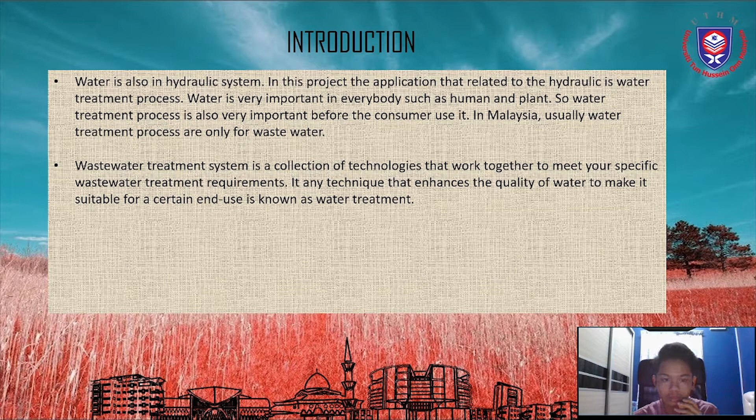Wastewater treatment system is a collection of technologies that work together to meet your specific wastewater treatment requirement. So water treatment system is mainly involved with wastewater, because wastewater is from water pollution. So we wanted to treat it first by using the treatment system.

So there are 7 stages in the water treatment process: storage, screening, aeration, coagulation and flocculation, sedimentation, softening, filtration, and lastly disinfection. These 7 stages are very important to make sure the water produced is clean and safe to use.

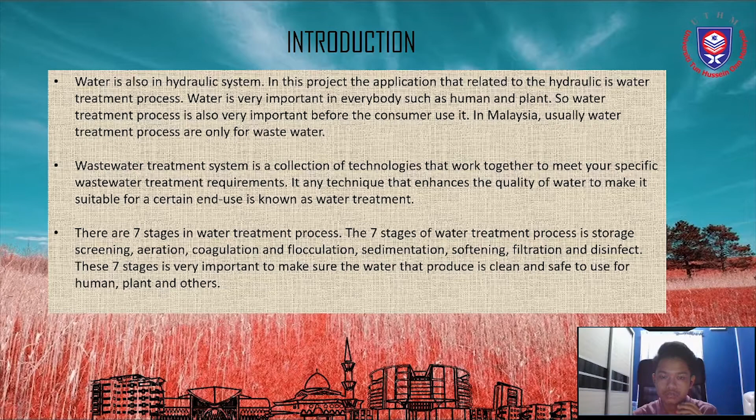for human, plant or others. Okay, why did we want to choose the water treatment process? Because we want to know more about the water treatment process. So from this, we like to say that water treatment process is very needed for human, to make sure the water we use is high quality and safe to use.

Alright, next for construction process. Water treatment utilizes many treatment processes to produce water of the desired quality. Water treatment describes the processes used to make water more acceptable for a desired use. This can include use as drinking water, industrial process, medical, and many other uses. The goal of all water treatment process is to remove existing contaminants in the water or reduce the concentration of such contaminants, so the water becomes fit for its desired use.

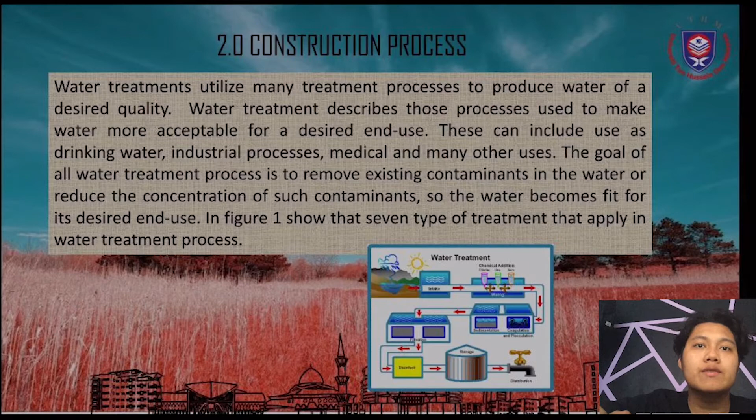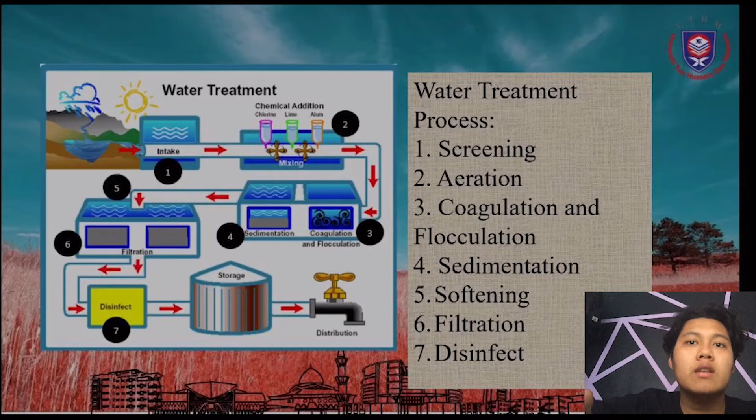Figure 1 shows 7 types of treatment that apply in the water treatment process: screening, aeration, coagulation and flocculation, sedimentation, softening, filtration, and last but not least disinfection. In this project, we just explain 3 processes and the method for each process, such as coagulation and flocculation, sedimentation, and filtration process. These 3 processes will be explained in specific detail for water treatment.

Alright, first we go through coagulation. Coagulant chemicals with charge opposite those of the suspended solid are added to the water to neutralize the negative charge on non-settlable solids, such as clay and color-producing organic substances. Once the charge is neutralized, the small suspended particles are capable of sticking together.

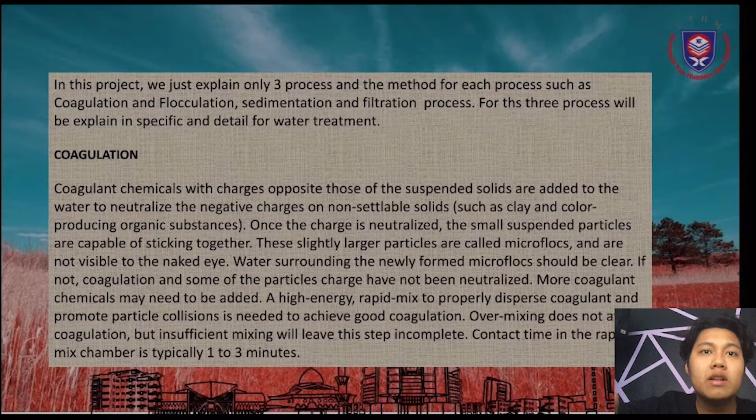These slightly larger particles are called microfloc and are not visible to the naked eye. Water surrounding the newly formed microfloc should be clear. If not, coagulation has not occurred and some of the particles have not been neutralized. Alright, this is the technology for coagulation.

For the second process is flocculation. Flocculation, a gentle mixing stage, increases the particle size from the submicroscopic microfloc to visible suspended particles. Microfloc particles collide, causing them to bond to produce larger, visible flocs called pin flocs. Floc size continues to build with additional collisions and interaction with added organic polymers.

Macroflocs are formed and high molecular weight polymer called coagulant aids may be added to help bridge, bind, and strengthen the floc, add weight, and increase settling rate. Once floc has reached its optimum size and strength, water is ready for sedimentation.

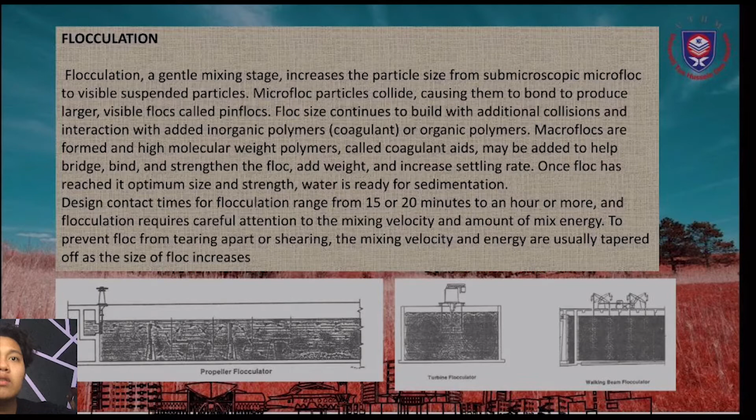Design contact time for flocculation ranges from 15 and 20 minutes to an hour or more, and flocculation requires careful attention to mixing velocity and amount of mix energy, to prevent floc from tearing apart or shearing. The mixing velocity and energy used are usually tapered off as the size of floc increases. Alright, for the last process is sedimentation.

Sedimentation, or we can call clarification, is the process of letting suspended material settle by gravity. Suspended material may be particles such as clay or silts, originally present in the source water. Suspended material or floc is specially created from material in the water and chemicals used in coagulation or in other treatment processes, such as lime softening.

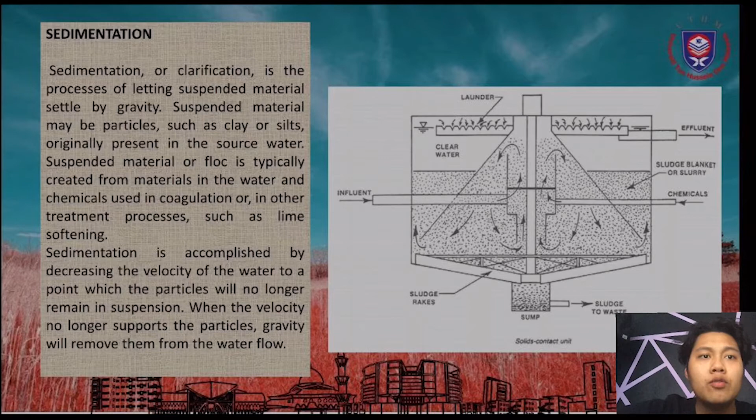Sedimentation is accomplished by decreasing the velocity of the water to a point at which the particle will no longer remain in suspension. When the velocity no longer supports the particle, gravity will remove them from the water flow.

Alright, this is for coagulation, flocculation, and sedimentation combined. Some designs incorporate coagulation, flocculation, and sedimentation as a single unit, either upflow solid contact units or sludge blanket units. Most upflow solid contact units use recirculation of previously formed flocs to enhance floc formation and maximize usage of treatment chemicals.

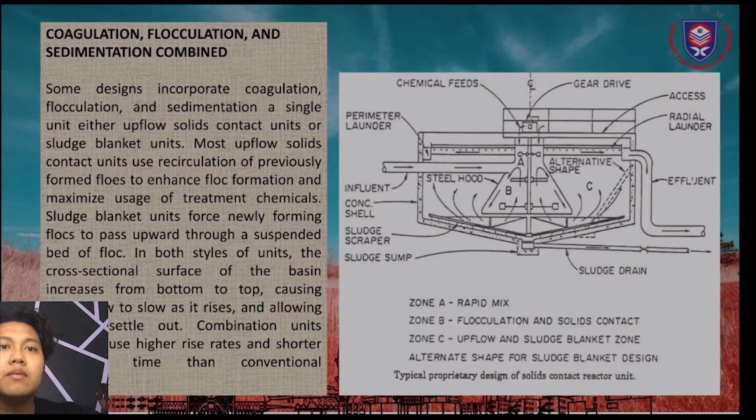Sludge blanket units force newly forming flocs to pass upward through a suspended bed of floc. In both styles of units, the cross-sectional surface of the basin increases from bottom to top, causing water flow to slow as it rises, and allowing floc to settle out. Combination units generally use higher rise rate and shorter detention time than conventional treatment.

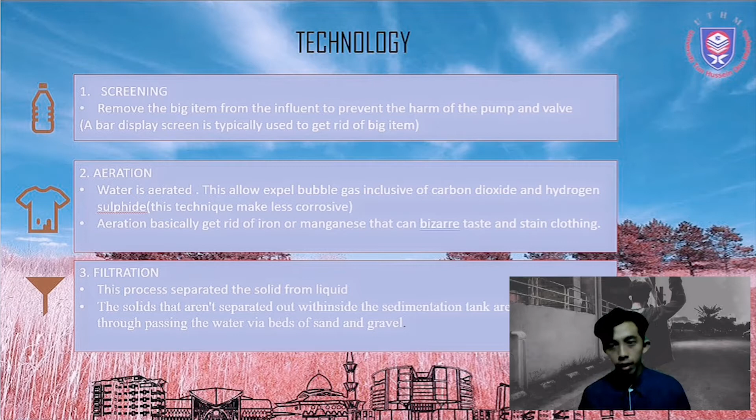This is what it means: when we open the pipe, iron and manganese are also there. So when we do the aeration process, the iron and manganese no longer exist.

I want to continue with filtration. Filtration is the process that separates solids from liquids. The unseparated solids inside the sedimentation tank are eliminated by passing the water via beds of sand and gravel.

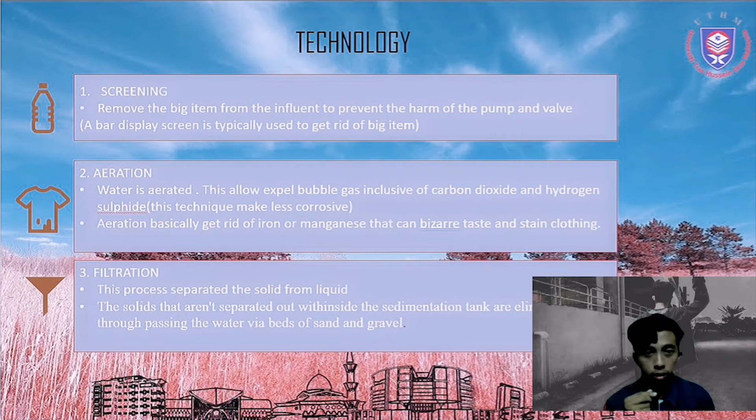So I will continue our presentation about issues in the water treatment system. The first is inaccurate data. Inaccurate data influences patterns in the data as well as makes it difficult to determine which prevention should be done.

Instruments used in the water treatment system are insufficient to check all parameters to detect the problem at an early stage. So this issue causes difficulty in recording and analyzing or taking data accurately.

So there are several parameters that are important to perform monitoring. First is Silt Density Index or SDI. Second, Normalized Permeate Flow or NPF.

Third, pressure across each stage. Next, percentage salt rejection (PSR) and percentage salt passage (PSP), and the last one is UV intensity.

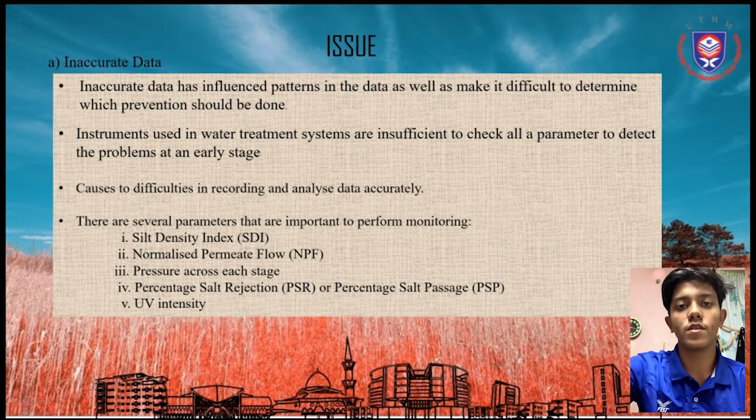So the second issue is membrane fouling or membrane pollution. Membrane fouling causes particulate matter to adhere and get stuck on the membrane surface, which is the surface of the filtration process.

Membrane fouling causes a decrease in efficiency of pressure and an increase in energy consumption when build-up is not checked. Some of this pollution can be reversible and others irreversible.

There are different types of fouling that can occur: first, solid; second, scaling; and the last one is microbiological.

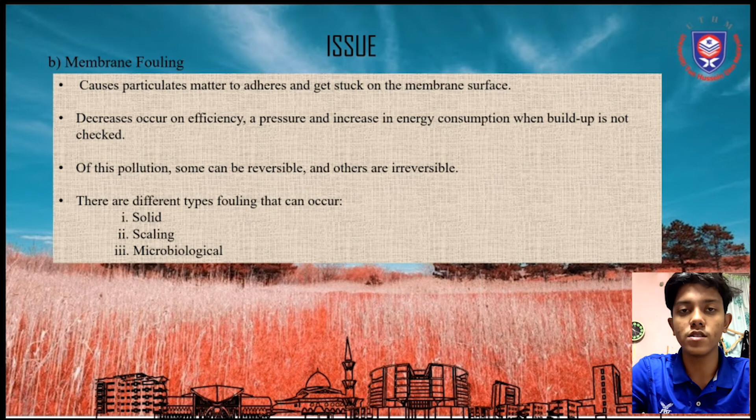Last but not least is poor maintenance and energy consumption. The first is poor maintenance. Poor maintenance has serious implications for performance in the water treatment process.

Poor maintenance can result in increased cost. This is because when technology is poorly maintained, it can lead to serious damage to the system of technology.

So selection of a good maintenance company or organization is important for the water treatment system to run smoothly.

Next is energy consumption. In the water treatment process, high energy consumption can be seen in the water filtering process.

This is because the water filtering process consumes between 3% to 15% of the country's electricity each year. So high energy consumption will cause the cost for the water treatment system to also increase.

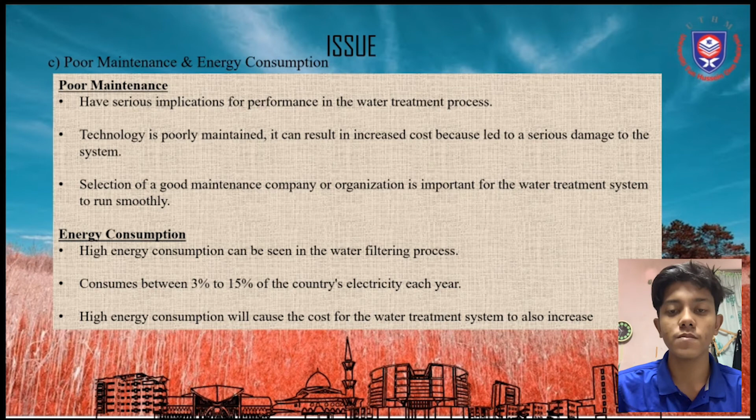From the conclusion, we can conclude that in this project, water consumption has risen significantly globally in recent years as a result of population growth and rising per capita usage.

Because of human growth, the usage of water is also needed by humans. So we wanted to say that water is very highly used by humans day by day.

So from that we wanted to say that the water treatment process is very, very important. If water treatment process is not used, population can't grow.

Humans very much need water, and trees also. We can say that living things very much need water.

Other than that, the water treatment process is very needed because day by day there is so much water pollution, such as so much rubbish in the river and so on.

So water treatment process is very needed because it wants to make sure that the water is not toxic and is safe for humans and other living things.

So the water treatment process is also very related to wastewater. We cannot live without water. Thus wastewater is and will always be with us.